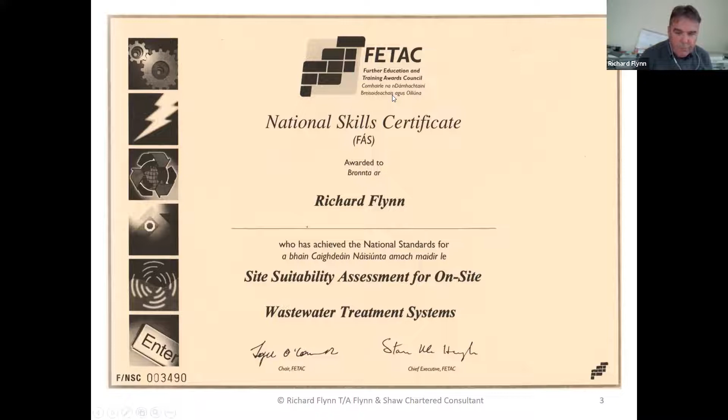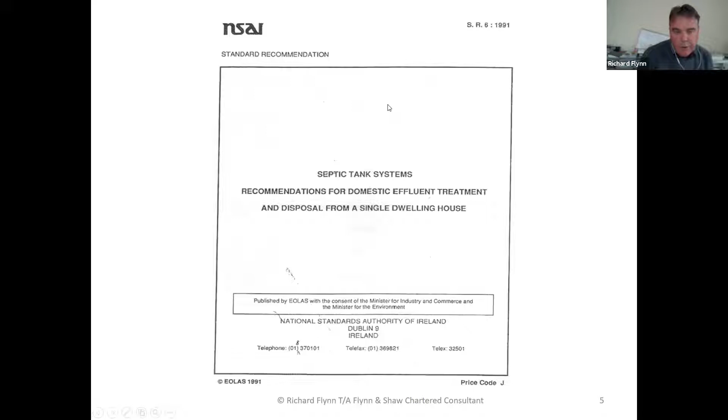Just to give some background on Irish regulations and legislation: the first standard we got was the National Standards Authority of Ireland, Standard Recommendation 6 of 1975. I'm sure at the time it was a fantastic document, and the start of something better. This was replaced in 1991 with SR6 of 1991, which just updated the standards a bit more. In 2000 we had the EPA manual, which kicked off the whole EPA code of practice and influenced where our industry was going. It took 9 years after the manual to actually get to the code of practice.

The code was transposed into Irish law, and its part of legislation replaced the SR6 of 1991 and formed part of the building regulations.

In 2016, we started a review of the code. The review was based upon research carried out by Laurence Gill's team at Trinity College and the EPA STRIVE 161 report, which introduced lower permeability sites and gave the opportunity for sites with percolation values up to 120 to be considered for suitable treatment of wastewater.

I had hoped when we started this review that we would incorporate constant head testing for lower permeability sites, but unfortunately it didn't happen.

The common theme between all this legislation from 1975 to date is a combination of trial hole assessment plus percolation test. Standards are different in other countries - some people just have trial hole assessment, some just have percolation tests. That is the common theme here, and it's the theme we're working to.

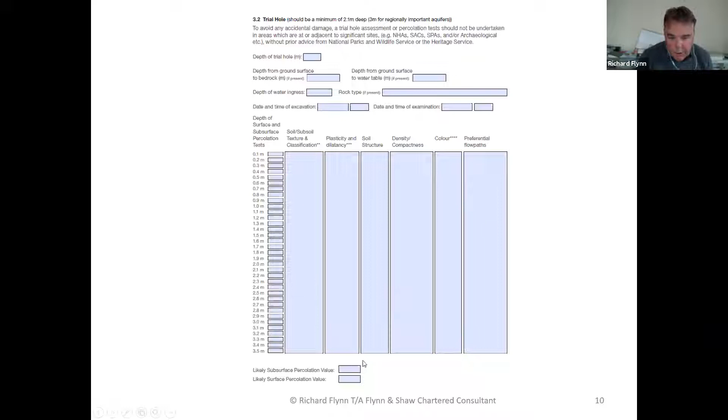The interesting thing at the bottom here is following our analysis of the soil profiles, we attempt to put a likely subsurface percolation value and a likely surface percolation value.

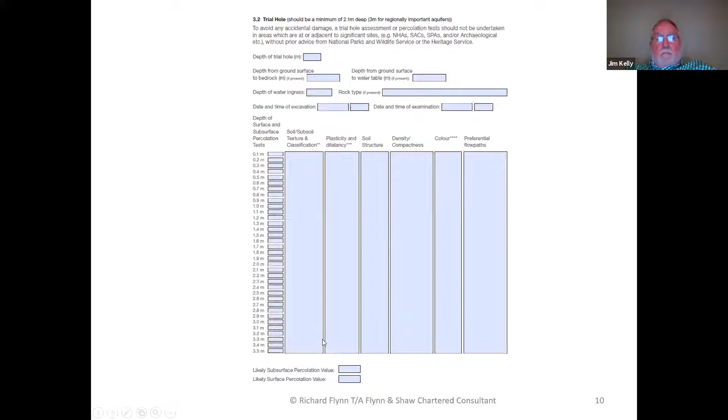Let's look at it in more detail. Our trial hole assessment is carried out based on British Standard 5930 of 1999, where we look at the soil profile, texture and classification, plasticity and dilatancy, soil structure itself, density, compactness. We look at color, signs of mottling in the soils, preferential flow paths, and whether we have any fractured bedrock in place.

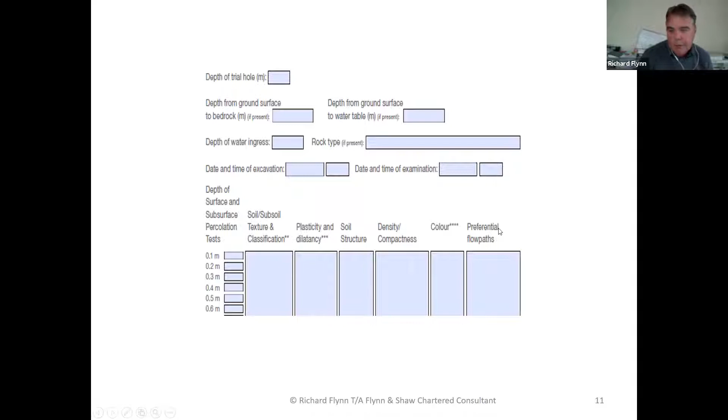And this is our percolation test. It's based on 3 test holes where we get an average value at the end of it. It involves pre-soaking - we pre-soak twice between 4 and 24 hours before the actual test, and proceed with the test. Our result is the number of minutes per 25 millimeters drop.

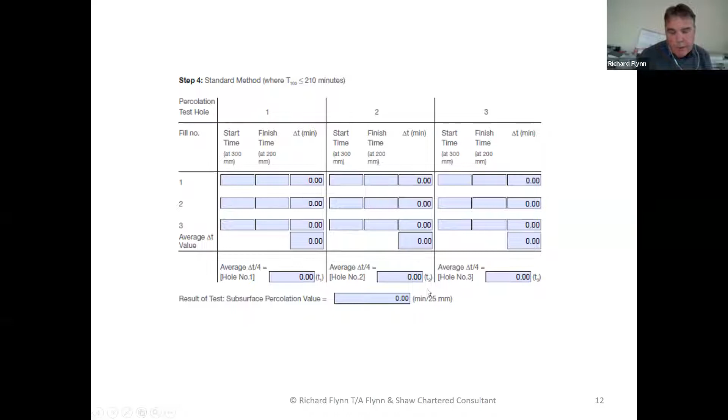So if we have a percolation value of 50 minutes for 25 mil, it means I'm on site for 12 hours at least doing my percolation test.

And I did hope that if we had constant head testing, it would reduce that substantially. We will hear from Lawrence and Joanne shortly about their research, and hopefully that will move things forward in Ireland.

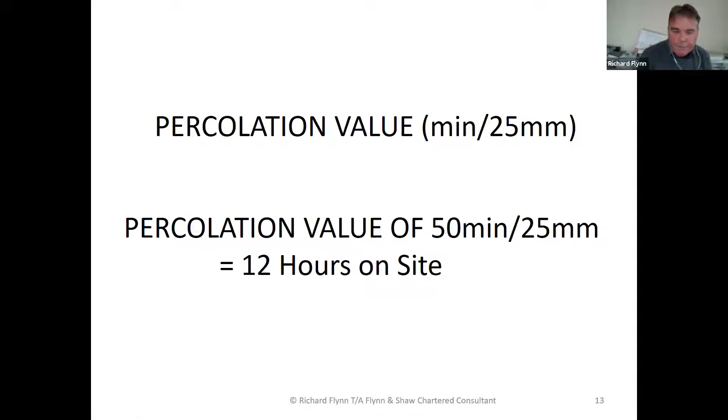So I was lucky to be on site earlier this year with Lawrence, doing some constant head tests, and it pushed me to look at acquiring my own constant head test kit.

So I've done some research, got on the email to my friend in Hawaii, Dendra, and progressed from there to Prince Edward Island in Canada, where I met another fantastic lady, Kelly Galloway. Kelly and I had some detailed discussions and knowledge sharing, and with good logistics, we ended up getting an ETC Pask permeameter over to Six Mile Bridge in the island of Ireland.

I've been using the permeometer for the last couple of months. I must stress, all of my site assessments are carried out strictly in accordance with the EPA Code of Practice and all the methods and standards therein. My use of the Pask permeameter is strictly for my own personal research, just to broaden my knowledge and understanding of alternative methods and the scientific methods for assessing soils.

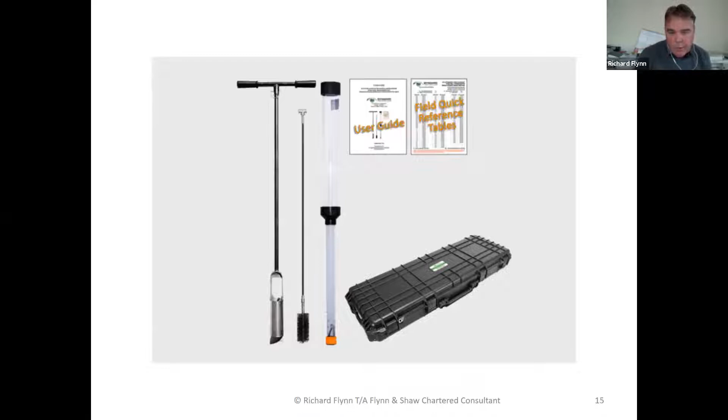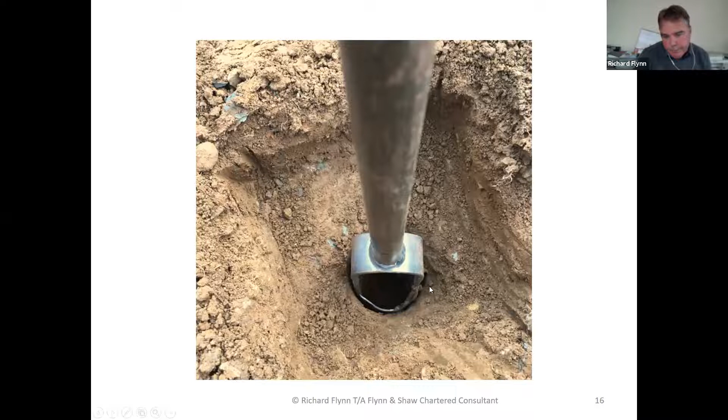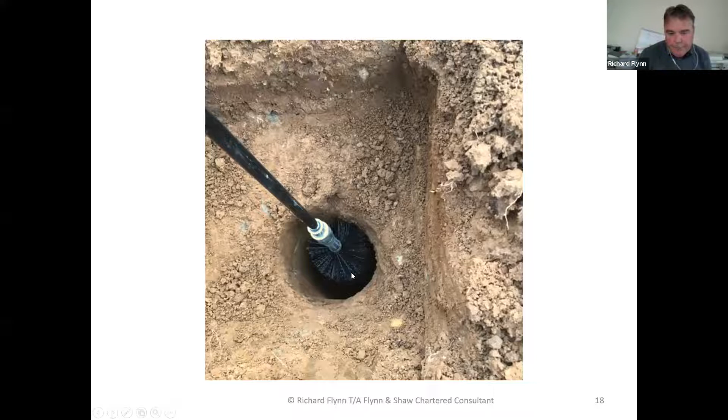That's the permeometer test kit, which we'll hear a lot more from Kelly shortly. The next few slides are just me using it on site. That's the auger for digging the test hole. That's the test soil, you can see it's pretty consistent. We have a little wire brush for exposing the pores. And this is the permeometer in action.

I'm really impressed with how easy it is to use the permeometer. Very impressed with the consistency of results, but I'm even more impressed with the time it's taking to actually complete the test.

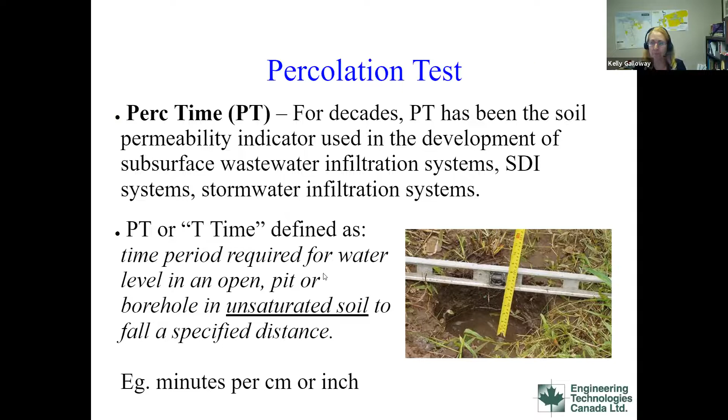The problem with the perc test is that the results can change significantly depending on test conditions. The perc test, or perc rate, is not a true soil property - it can vary with changes in background soil moisture, soil capillary properties, and can even be manipulated to a certain degree to almost produce a desired outcome by adjusting the diameter of the well hole, water depth, etc. Because it's not a true soil property, when reporting perc time you really need to qualify the parameters used in the test, such as water depth, hole radius, and soil type.

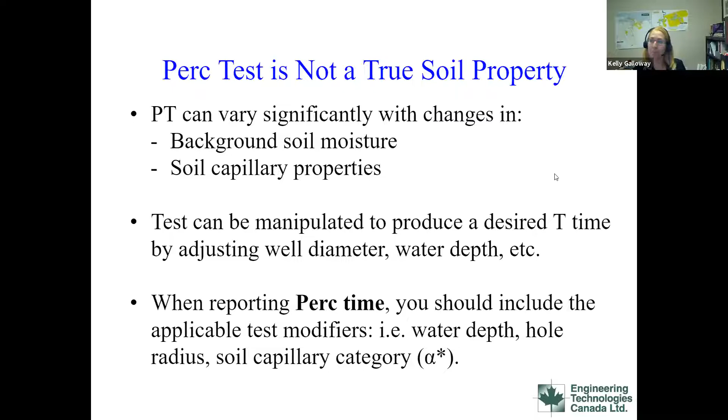So as I mentioned, I'm not at all advocating that we should not do test pits. I'm definitely an advocate and a fan of the so-called soil morphology approach - doing test pits. And the challenge with that - I come from a civil engineering background, so I'm not a soil scientist.

I'm not steeped in soil science, and oftentimes when we're trying to teach practitioners with varying levels of education from the on-site industry, or even people with significant post-secondary education in something other than soil science, it's challenging to convey the information and skills that soil scientists get in their years of training - to properly discern the subtleties of soil texture, and especially structure, and other soil characteristics we're usually recording when we do a test pit evaluation and log the soil profile.

But nevertheless, there seems to be growing support throughout the on-site industry that test pits, or the soil morphology approach, is a better approach than just digging a hole in the ground, pouring water into it, and seeing how fast it seeps into the ground.

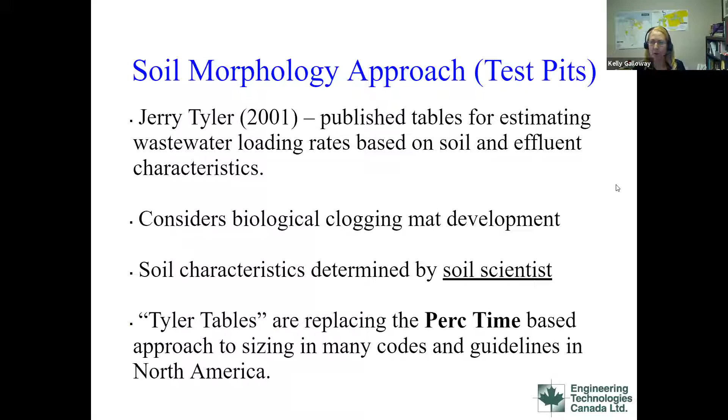So why do we need, is there a need for accurate infiltration testing? I would say yes, that it's very helpful to complement the test pit, especially when the soil texture is not necessarily all that clear. For example, when you get into sandier soils - sands, loamy sands, sandy loams - where the sand subclasses are not able to be easily determined just by hand texturing, which is what most practitioners in the field are going to be doing unless they're taking samples and sending them to a lab for sieve testing.

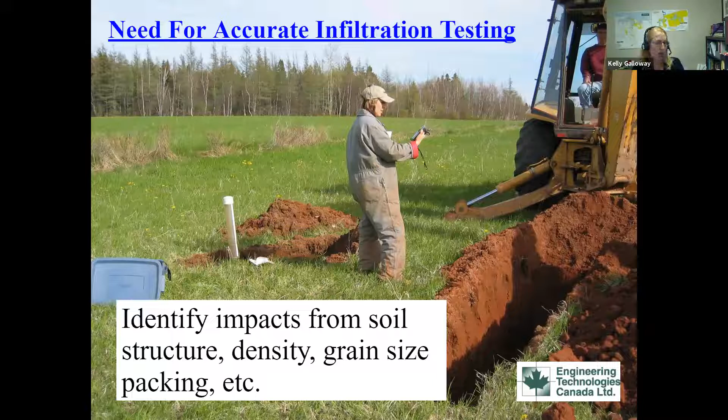We also find that sometimes it's hard to tell, just from a test pit evaluation, the impact of subtle changes or differences in soil structure or density on the permeability, or ultimately on what's an appropriate long-term application rate or soil loading rate for an on-site sewage system. So this is where having another tool or piece of information to consider along with the test pit results is helpful.

For example, in my area here where I live and work in Prince Edward Island in Eastern Canada, sandy loam soil is the dominant soil type across the province. But it's a glacial till geology, so the soil tends to be quite dense. Once you get down deeper than 2 feet, it starts to get very compact. But the degree of density or compactness and the range in sand particle sizes can vary quite a bit across the island.

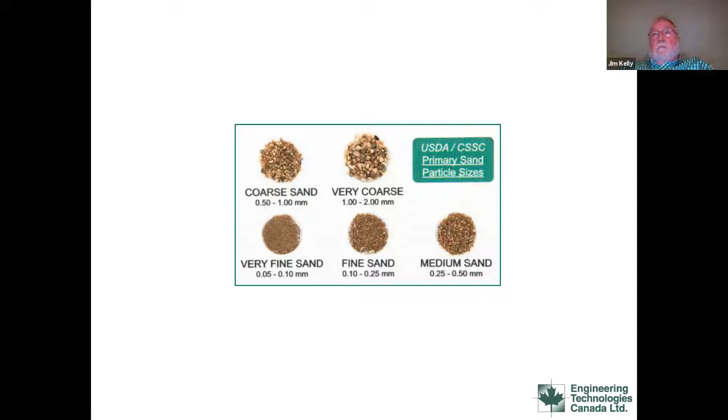I've had discussions with my local regulators here - one of them called me up one day investigating a failed system. They were looking at the test pit data, and based on that data, it looked like it should have been very suitable soil - a sandy loam. And I said, well, did anybody collect any samples to see, is it a fine sandy loam, a medium sandy loam, a coarse sandy loam? Because those different sand grains can really affect the clogging, the potential for biomat to form, and the clogging potential of the soil.

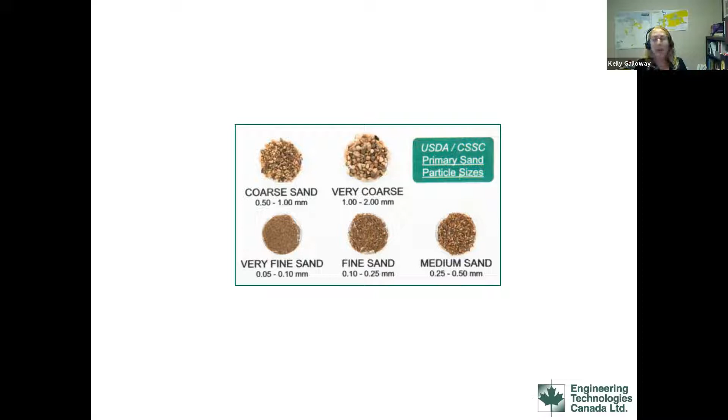Long story short, that particular system - the regulator went back and got some samples tested, and it turned out there was a fairly significant proportion of fine and very fine sand in this sandy loam. Whereas a few miles down the road, you could have a sandy loam that's more medium or even coarse sand. What we find is when we're doing permeability tests in those sandy loams with a lot of the finer sand, not surprisingly, we're getting much lower permeability results. So it's kind of a check on the visual and textural analysis that practitioners are doing when they do the test pit.

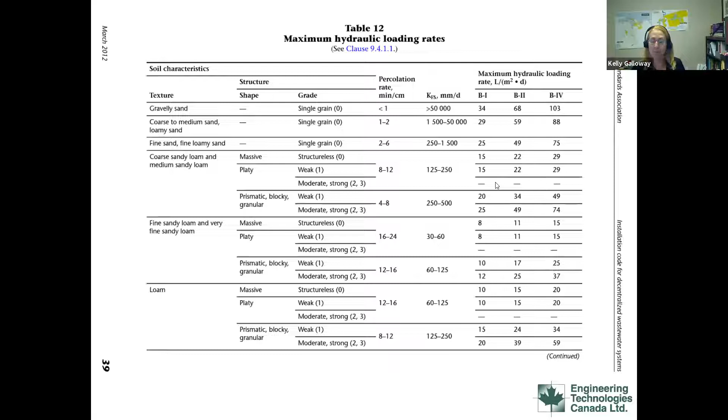So this is, I mentioned the Tyler tables and Jerry Tyler's work - I was involved with the Canadian Standards Association on a technical committee that developed a code for decentralized wastewater systems, a national code for Canada. As part of the committee work, we incorporated and built some hydraulic loading rate tables based on the work of Jerry Tyler. It's quite apparent from how this is broken down, and from Jerry Tyler's experience and many of us involved in this committee, that it was appropriate to break this down into different classes - not just loamy sand or sand, but considering those sand subclasses and the proportion of fine or very fine sand, because it's going to have a difference on what is an appropriate loading rate.

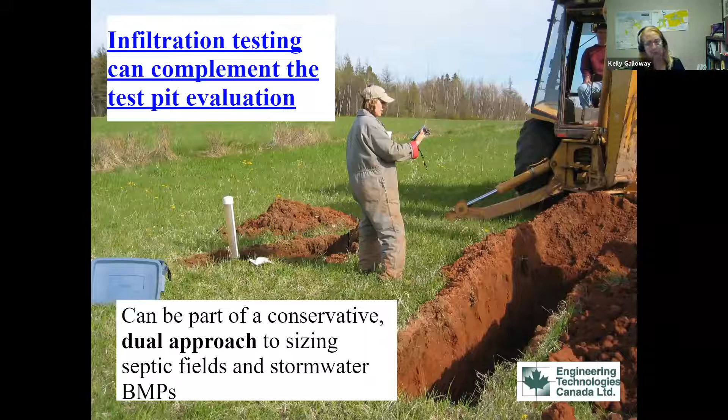So that's how we've ended up in Eastern Canada, and several other provinces are using more of a dual approach now to site evaluation, where in addition to doing the test pit evaluation, they're also requiring in situ permeability tests with a constant head permeameter. Some are still allowing practitioners to do percolation tests, but there is a movement to convert over to permeability testing. We found that practitioners of varying skill levels can successfully be taught how to do the tests.

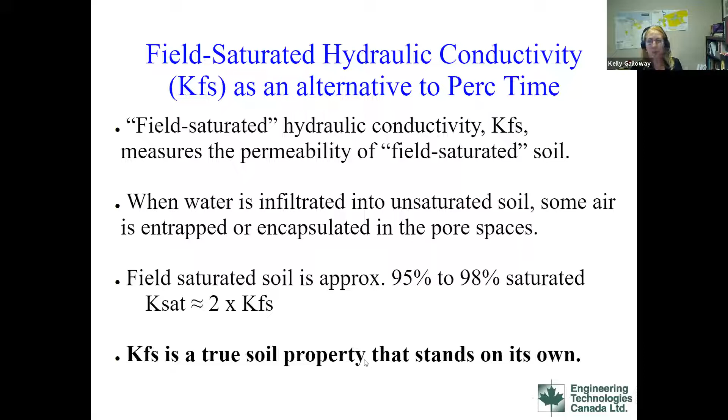So in order to determine KFS in Canada, and I think it's starting to catch on more in the US, a lot of work has been done over the years by a couple of researchers formerly from the University of Guelph in Ontario, Dave Elrick and Dan Reynolds, and they published widely on a method that they started doing research on, or developed back in the early 80s, maybe even a little before that, called the constant head well permeameter method.

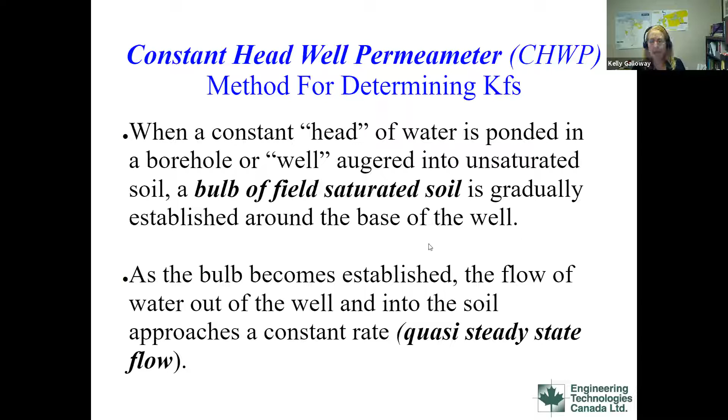The method is based on the observation that when a constant head of water is ponded in a borehole or a well in unsaturated soil, you get a bulb of field saturated soil that gradually establishes around the base of the well. And as that bulb establishes, the flow of water out of the well and into the soil approaches a constant rate after a period of time, which is a so-called steady state rate of flow.

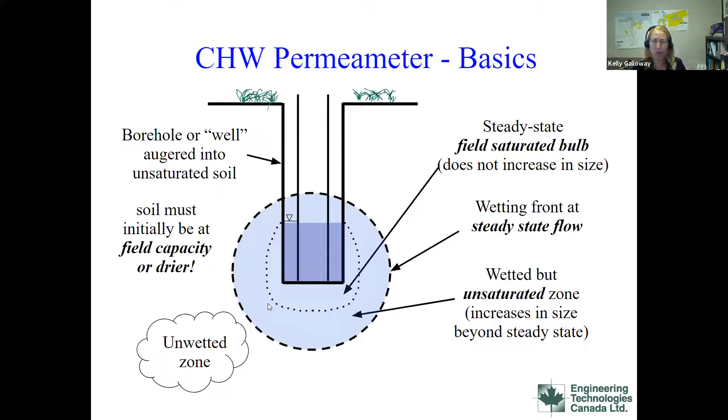But as the water continues to move out into the soil, there's a wetting front that will continue to move beyond the field saturated bulb. But the field saturated bulb itself does not continue to grow in size. And that's just critical to the whole theory behind how you calculate KFS from this method.

So when doing a test, it has to be done when the soil's at field capacity or drier. Saturated soil has no capillarity, and you won't get a proper result if you try to do a test in saturated soil.

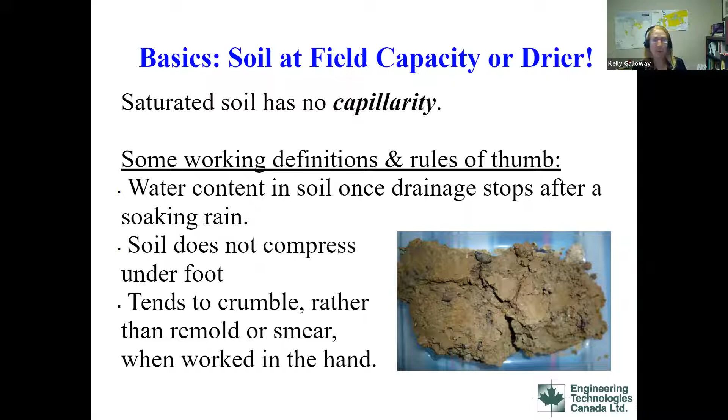So the constant head well permeameter method can be used with any number of constant head permeameters available on the market today. And one of the important aspects or features of it is that it constituted an improvement over the previous state-of-the-art method published in the literature known as the Glover analysis.

Now, the problem with the Glover analysis, as reported by Elrick and Reynolds, is that it only accounts for one component of flow out of the borehole, whereas the constant head well permeameter analysis accounts for all three components of flow: the hydraulic push from the head of water, the gravitational pull of water through the base of the well, and capillary suction into the surrounding soil.

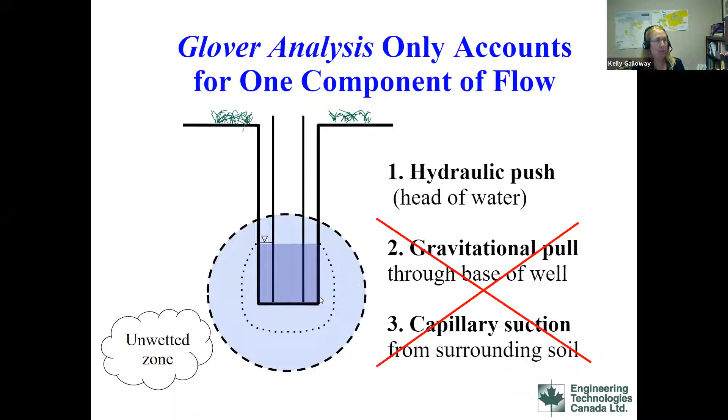So Reynolds and Elrick reported that under some conditions, because the Glover analysis only accounts for this one component of flow, under certain conditions, such as a small ponded head in relatively dry, fine soil, the Glover analysis can actually overestimate KFS by an order of magnitude or more.

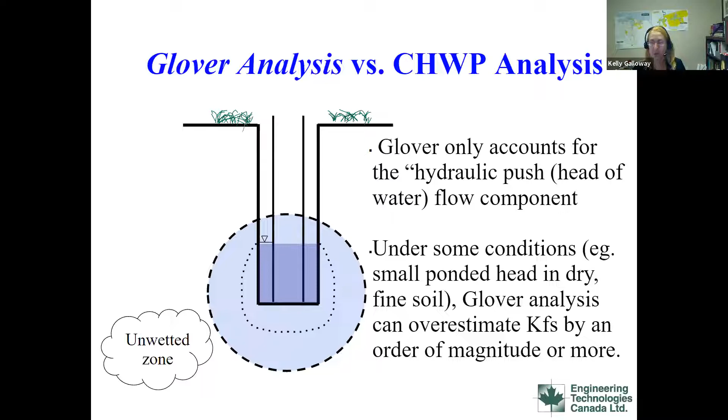So if you're using the Glover analysis to calculate KFS from your permeameter test data, in terms of on-site sewage system design, you could be less conservative, or not conservative enough, if you're coming up with KFS values that are too high, showing that the soil has a higher K value than it really does.

So again, the constant head well permeameter method accounts for all three components of flow.

Another essential part to doing a proper test is that the test be allowed to run long enough to reach steady state flow. Steady state flow is generally determined once you get 3 to 5 rates of fall on the reservoir, or the permeameter, that are the same. So unlike requirements for perc testing in some jurisdictions, there's no need for pre-soaking the hole.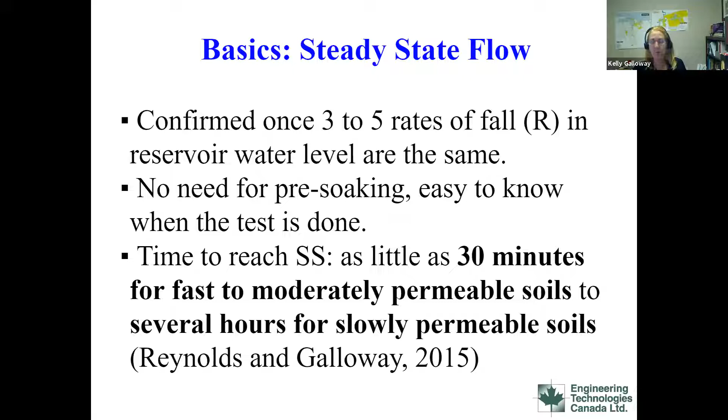Apart from cases where you're dealing with shrink-swell clays, where there may be some justification for pre-soaking to allow that clay time to expand, for soils that are generally considered faster, moderately permeable, and conducive to on-site sewage systems, in many cases it only takes 30 minutes to an hour to run a test. If you're in a clay soil, very fine grained, it will take several hours to reach steady state usually. But for a lot of the better soils, you can complete a test in less than an hour.

So this is typically what you would see during a test, where the rate of fall tends to level out over time. Once you get three or four readings in a row with the same rate of fall, you know you've run the test long enough and can stop it at that point.

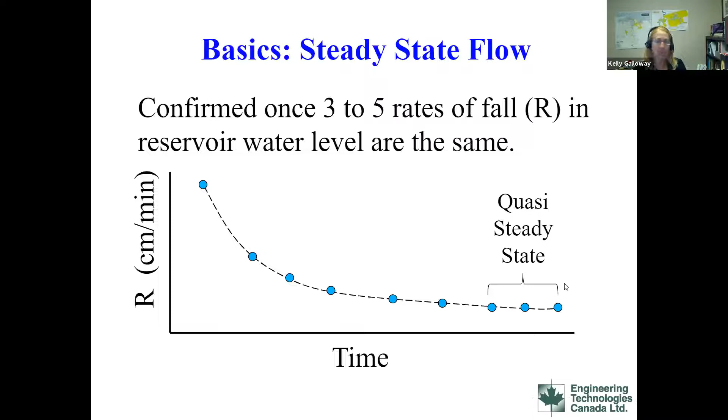Just a little graphic here to show what's happening underground with different soil textures. If you're doing a test in sand, the volume of soil you're testing, the shape of that field saturated bulb, is going to be different than if you're in a finer grained soil like a loam. With sand, the field saturated bulb tends to be deeper down in the soil, and if you're testing in clay, that field saturated bulb can actually be quite thin. So it's something to bear in mind when testing a particular soil horizon, that you're only really testing an area very close to the well hole.

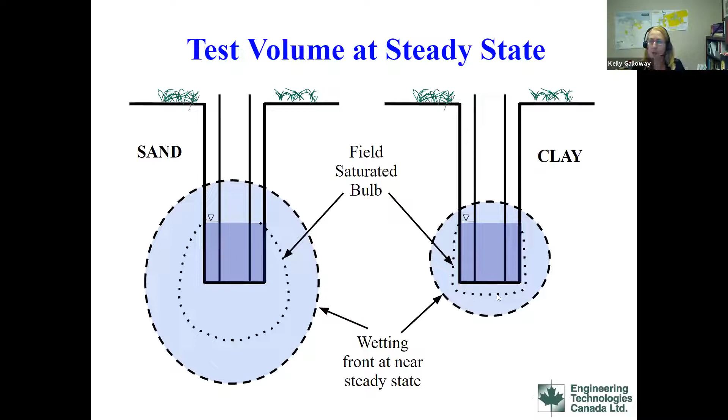So to determine KFS, there are just a few things needed. There are different approaches with the single head or the constant head well permeameter method, the single head method and the dual head method. For on-site sewage applications and for ease of use by practitioners, generally the single head method is what's taught or recommended. But to use this method, the practitioner has to be capable of identifying the soil they're testing out of one of, say, four broad categories, so they can determine which soil capillary category the soil falls into and use the appropriate table or calculation to determine KFS.

So they just have to be able to slot it into one of these categories, and most practitioners, in my experience, after some basic training, are able to do this. This category here, the 0.12 moderate capillary category, covers most structured soils and medium sands. It's sort of if you're not really sure, if you're on the fence, this is probably the best one to pick.

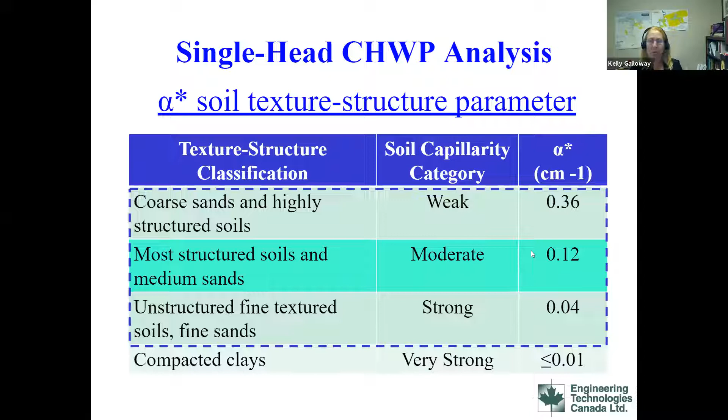And the work of Reynolds and Elrick has shown that if somebody is off by a category, it's not highly significant in terms of the impact on KFS. The error introduced is not that significant. So even if they are off by a category, most practitioners, after some basic training, will pick an appropriate category, or at most be off by one way or the other.

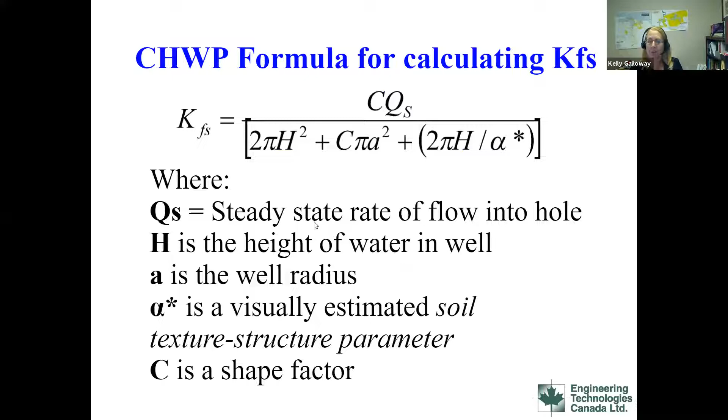So that's the formula that's the basis of the constant head well permeameter method. But as you'll see here, we've developed some alternative quick reference tables, so that practitioners who don't have advanced post-secondary education and math skills don't need to crunch these numbers or program them into a spreadsheet.

So as I mentioned, the constant head well permeameter method is a mathematical approach or model published by Elrick and Reynolds, the outcome of their research over a couple of decades ongoing. But it can be used with many different types of constant head permeameters.

In addition to the permeameter we have put together, there are several others many of you are familiar with in the US, the Amoozemeter, the Johnson meter, the Aardvark permeameter, the Guelph permeameter, which was named after the University of Guelph, where Reynolds and Elrick were the university where they did all the research. But any one of those permeameters can be used with the constant head well permeameter method.

And I know in some parts of the US where they are using constant head permeameters, they're still using the Glover method to do the calculations. I'm of the opinion that they should really be looking at the work of Elrick and Reynolds and transitioning to the more scientifically accurate constant head well permeameter method, because it's generally considered, based on all the peer-reviewed publications and so on, that it was an improvement over the Glover method.

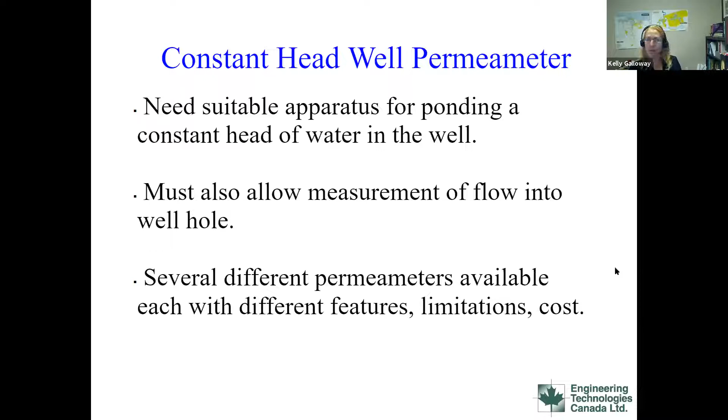So Richard had a shot of our permeameter kit, but that's just another one again. It's a very simple device, not like the Guelph permeameter or the Aardvark, at least. I'm not sure about the Johnson meter.

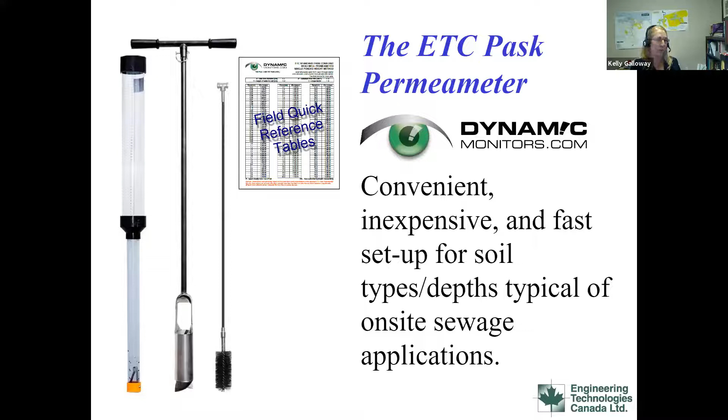They have a few more features and flexibility in terms of the depth you can go with the device. But we developed this particular device to suit the needs of the on-site industry, for what we felt were the majority of cases where the soil profile or the depth of tests required is usually within 4 feet of the ground surface. If you need to go deeper than that, you can. And if there's a test pit, if there's a backhoe or excavator on site anyway, because you're doing test pits, which I hope you are, since I'm an advocate of doing both, then you can use the machine to dig a safe hole that a practitioner could enter and then auger down to their desired test depth to do testing at greater depths.

So instead of crunching numbers through that yucky formula I showed you earlier, we've prepared a set of tables, one for each of those soil types. To use the tables, all the practitioner needs to do to get their KFS value is make sure they run the test long enough to reach steady state flow. So they need their rate of fall, calculated in centimeters per minute, and they need to decide what soil category they're in. Then they go into the appropriate table. If their rate of fall at steady state was 1 centimeter per minute, they go into the table and go across, and their KFS is 5.3 times 10 to the minus 6 meters per second.

These quick reference tables we've developed - I'm in the process of generating some new ones where the units will be in millimeters per day. We've also done them in inches per hour, so they can be generated in whatever units are preferred by that particular jurisdiction. But generally, either meters per second or millimeters per day are the common units that KFS, hydraulic conductivity, is expressed in. And I'm certainly moving towards millimeters per day.

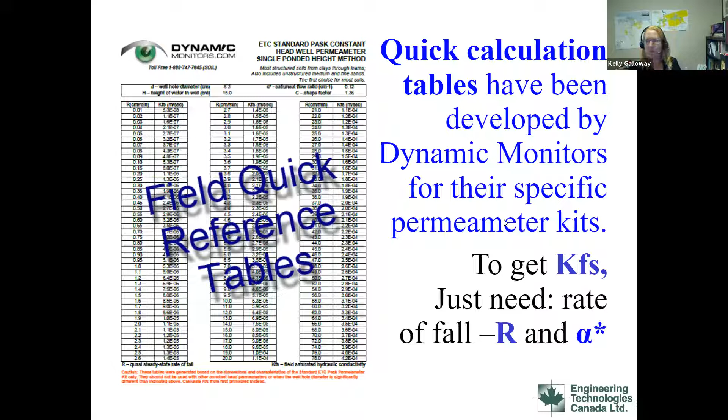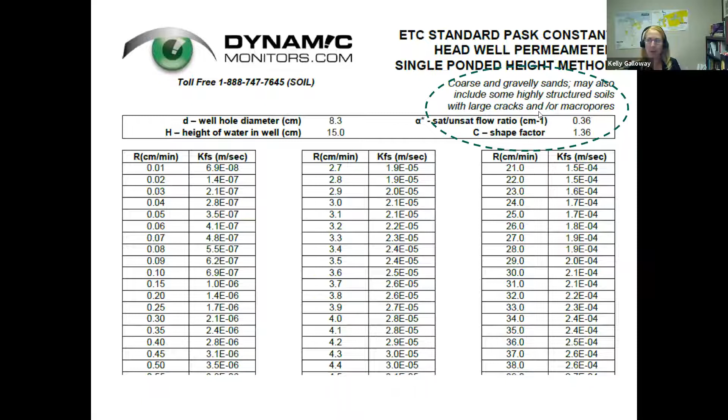So again, each of these tables relates to a soil category, the different capillary categories. There's the 0.36 category, which includes coarse and gravelly sands. It may also include some highly structured soils with large cracks or macropores. These definitions come straight out of the research and publications by Elrick and Reynolds on the constant head method - this is all part of their research.

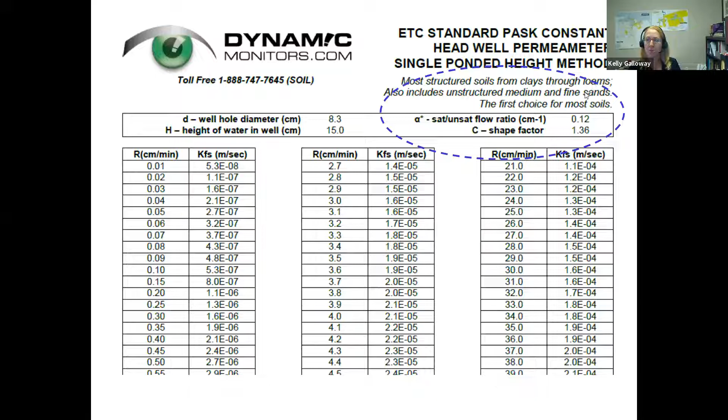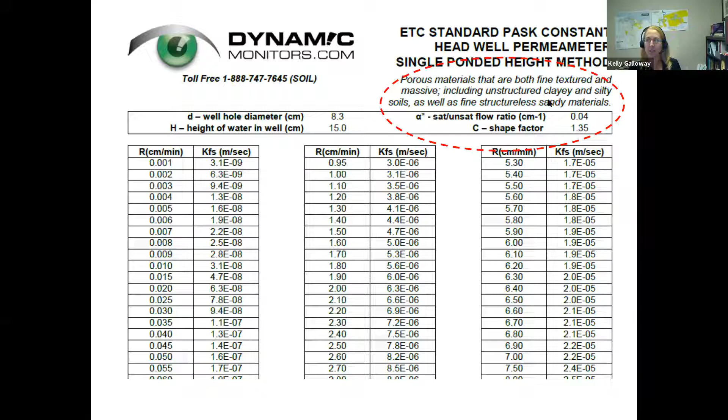This is the 0.12 table, which is the first choice for most soils if you're on the fence about which way to go. It covers most structured soils from clays through loams, and also includes unstructured, medium, and fine sands. Then the 0.04 is where you're getting into much finer textured soils - soils that are fine textured and massive, or unstructured clay and silty soils, and also very fine structureless sandy materials.

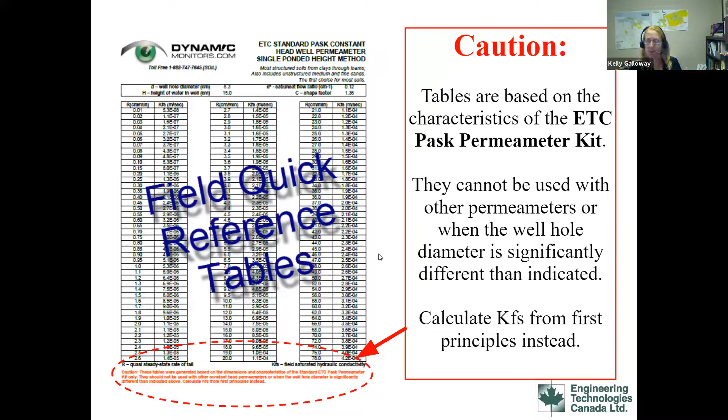So these tables have been developed. The caveat with using these tables is that they're developed based on using the particular auger that comes with our kit, which produces a particular hole size, and the ponded height of water that the permeameter produces. So if somebody has an Aardvark permeameter, a Johnson meter, or an Amoozemeter, you couldn't use these tables - you'd have to develop your own, otherwise you're not going to get the correct results. They're specific to our particular kit.

So some factors that can affect the accuracy of tests. The biggest one would be not waiting until steady state has been reached. You need to wait till you get at least 3 rates of fall that are similar.

In finer grained soils with a reasonable amount of clay and silt, if there's smearing or compaction during augering, and that smear layer isn't scraped off, which can be challenging with some soils. There's different tools that have been developed in addition to the brush approach. There's other ones that Reynolds and Elrick have reported on in their literature, little scraping tools and different things.

The soil can get compacted if you're not careful during augering. So we teach people to use the 2-finger 2-turn rule. Basically take a light touch with the auger, don't come down on it with all your weight, and empty the auger after a couple of turns so that you're not piling lots of soil in there.

And in some cases, if you're in very unstable soils, the well could collapse during measurement. If that's the case, you'd need to use some kind of well screen or some fine gravel around the lower reservoir in order to prevent that from happening.

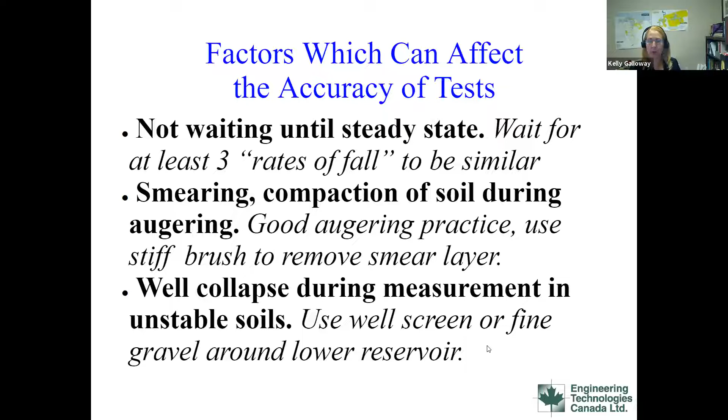Another factor that could affect the accuracy would be a poor choice of the capillary category that they have to choose from, one of 4 categories. But as I already mentioned, according to the work of Reynolds and Elrick, the K value is not overly sensitive to a poor selection of that category. Also the error from this can be minimized by using a larger ponded height, so a larger constant head in the well, and a larger well radius.

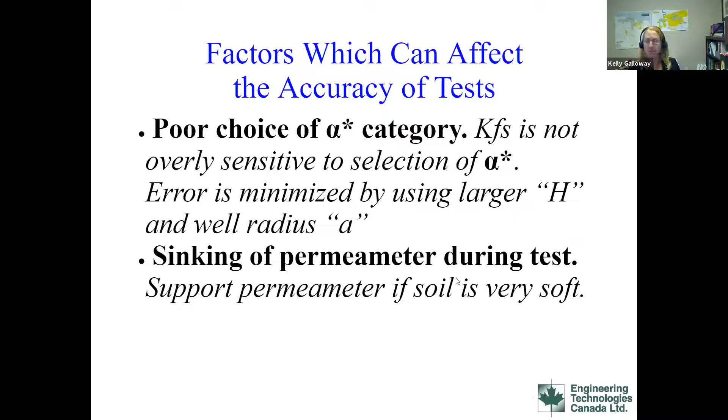Again, related to augering, if someone's not careful and they're kind of going wild with the auger and they end up augering a hole that's much larger than what is assumed, either in the calculations, or if they're using our quick reference tables, that'll produce erroneous results. So you have to be careful to make sure that the hole is uniform and you're not rounding out the hole as you auger, so that you end up with a bigger hole than what you're actually using in the calculations.

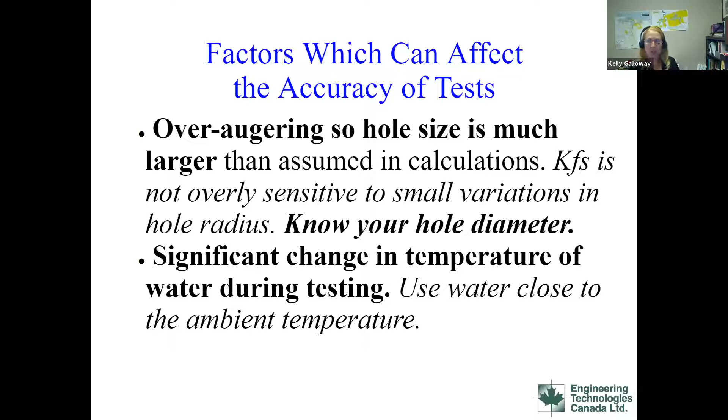So for jurisdictions that want to incorporate some type of infiltration test, but they're having difficulty letting go of the percolation test, or maybe they're thinking they might transition but don't want to just throw it out completely...

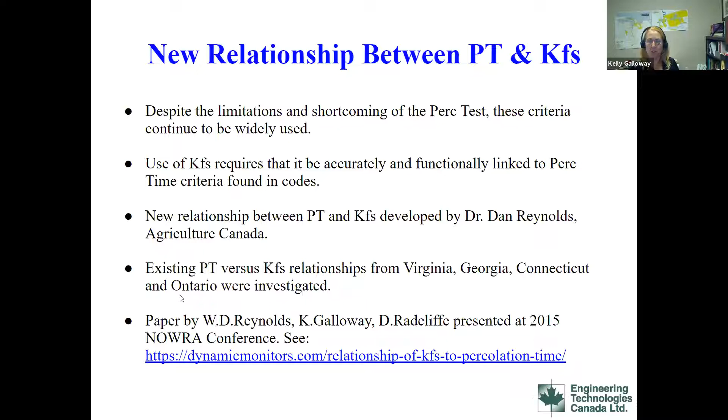A new relationship was developed a few years ago between Perc Time and KFS. Dr. Dan Reynolds of Reynolds and Elrick was the lead author on the paper and research, and also David Radcliffe from UGA, and I also had some input on the paper as well. So in the course of investigating or trying to come up with a new relationship, we looked into existing correlation tables between Perc Time and KFS that we found from various states and provinces, including Virginia, Connecticut, Georgia, and Ontario here in Canada.

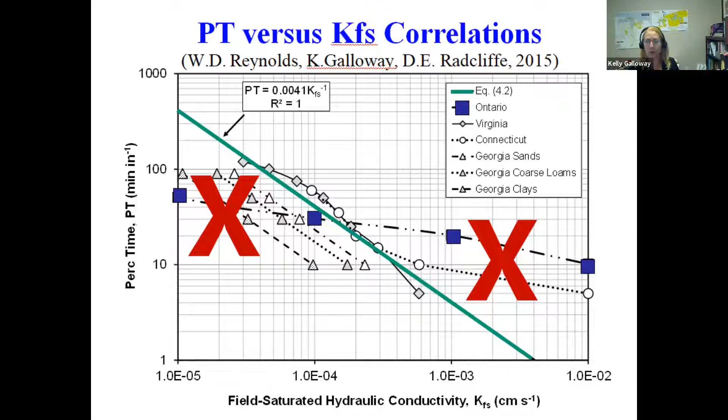So Dr. Reynolds developed a new method to calculate Perc Time from the KFS test. And like the constant head well, it was based on the constant head well permeameter method that's been around for 20 plus years. This approach, this model, allows for all three components of flow out of the well hole.

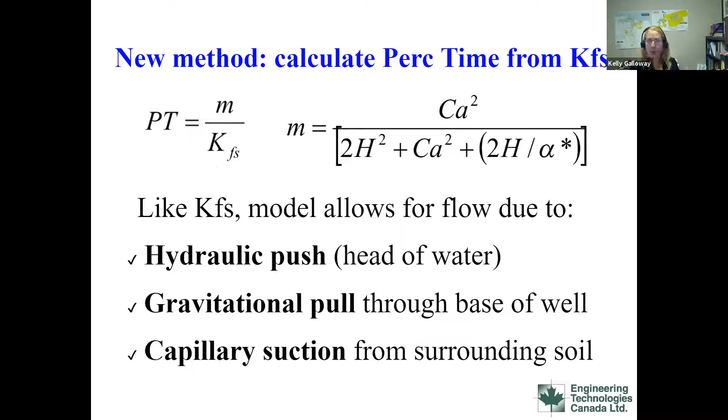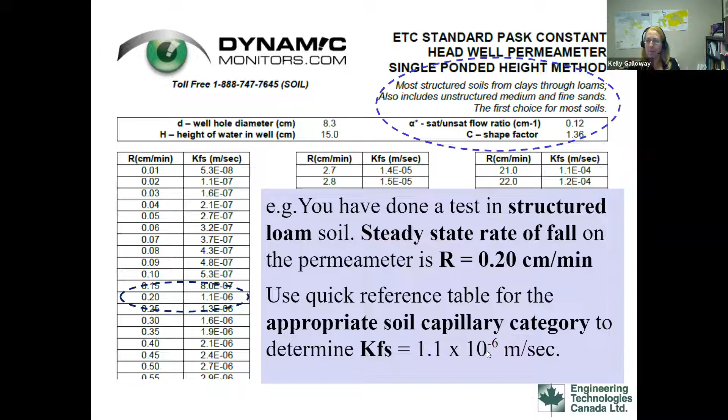Just as an example, if a practitioner wants to use a constant head permeameter for the various benefits it offers, but they need to report a Perc Time for regulatory reasons to comply with their local codes, they can do a test as normal, calculate their K value, and then calculate the Perc Time, or an equivalent Perc Time, with a relatively simple calculation. This constant M is selected from the table, and M divided by the K value gives you the equivalent Perc Time.

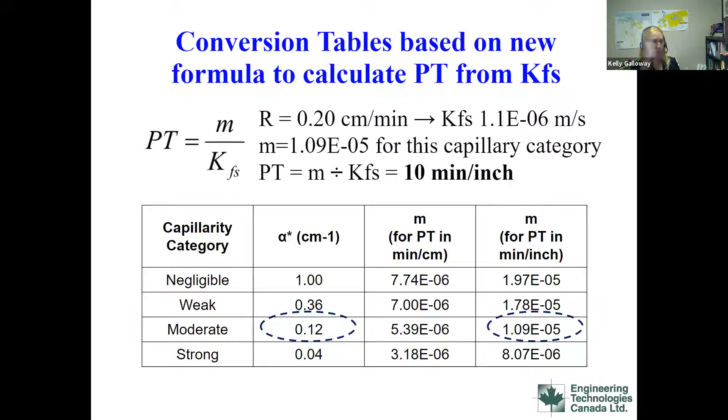We're also in the process of developing some quick reference tables that would save this step. So a practitioner would potentially have the K value in the table, and right next to it a column with the equivalent Perc Time.

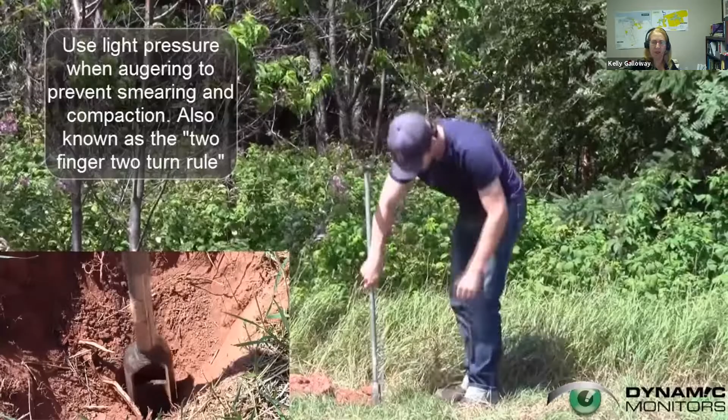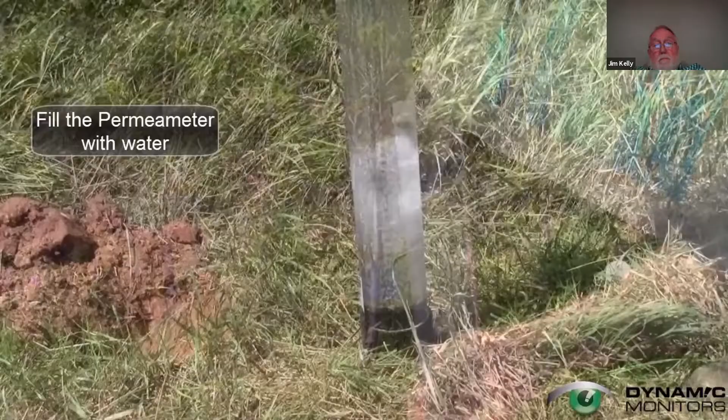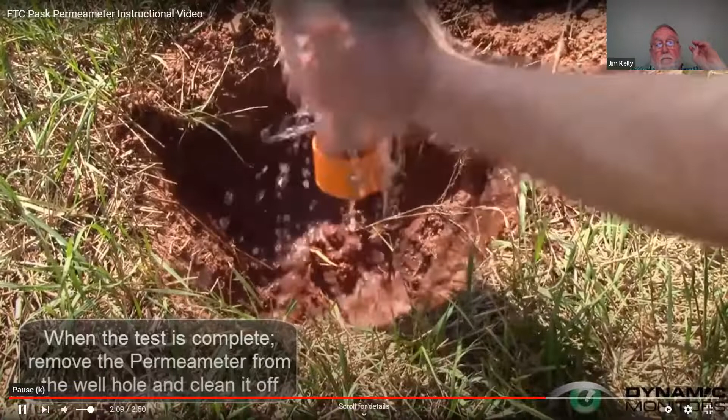Okay, this is just a short video that just shows the steps, what it looks like when somebody's doing a test in the field with an ETC Pask permeameter. Okay, the rest is just showing cleaning it off, so I don't need to show you that.

One comment I was just going to make, when it comes time, I often get questions about how often do you have to take readings when you're doing a test. If you're testing in a highly permeable soil or relatively fast soil, you may have to stay fairly close by and take a reading every minute, every 5 minutes, if the water is flowing out of the permeameter relatively quickly. But most sandy loam type soils or finer grained soils are going to have a little slower permeability.

So what a lot of practitioners do is they get their permeameter test started and then do their test pit profile, or they may get their test pit dug, do a quick check of the soil horizons, and see where they might like to do a permeability test to get additional information on a particular horizon to see what kind of a K value they get for that soil. And then auger down, or use a combination of backhoe and auger to the final testing depth, get their permeameter test set up, and then go back to logging their test pit profile.